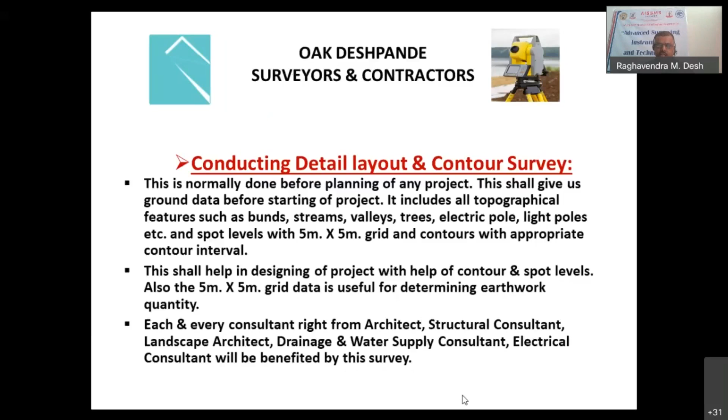Now, each and every consultant, right from the architect, structural consultant, landscape architect, services consultant, electrical consultant, will be benefited by this survey, and this data is very much useful for them for any kind of planning, estimation, and further execution as well. Now we'll move on to the other part.

Next part. Now, when this contour survey goes to the architect and the subsequent consultants, they prepare a plan based on this contour survey. Whenever this plan is prepared, we need to check whether it really fits on the ground. It is mostly for the convenience of the engineer on site. We can visually confirm that this is fitting well within the required setbacks and all, and the architects and the required consultants can come and check those things.

So we call it a block plan set out. After the planning is done based on the topographic survey, the layout is prepared and is ready for marking on ground. At this stage, we normally recommend to mark only the block plan on the ground, just to get confirmation about the layout fitting, and also to start infrastructure work, because on any site you want to start, you need to mobilize, build some roads, put up the labor camps and RMC plants and so on and so forth.

So for that, if the layout is marked, then you can visually see the areas which can be put to use right from the beginning, so that it doesn't disturb the entire layout. It should not so happen that when you are starting any work, you are putting some steel yard or the cement godown or the RMC plant, and suddenly you realize that the project has to start from the same site. So to avoid that, we need to mark all this layout on the ground.

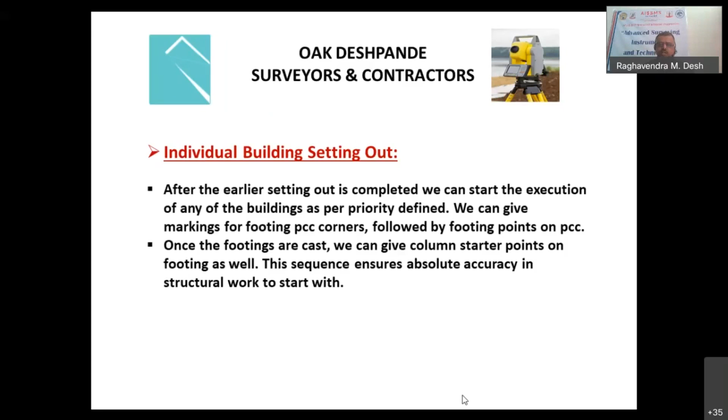So we can start with the excavation, go up to the required level, basement level, and then the individual building set out steps in. Now, after the earlier set out is complete, we can start the execution of any of the buildings as per the priority defined. PCC. Now in this process, normally, whenever we set out, we try to see that our visits to the sites are minimized so that we can optimize the work and give maximum output.

So it happens that once you go on the site, then the excavation is done. If it is an individual footing, we normally mark the PCC corners first inside the block plan set out. And once these things are marked, then the excavation goes on. Once the excavation is done, we don't need very much accuracy for the PCC. So the PCC has been laid there.

And once the PCC is done, now we have to start marking of footings or columns. Columns and footings go hand in hand. It's not that we mark footings separately and columns separately. The footing and column are marked based on the drawings available with us, the centerline plan and the block plan combined. When we mark these footings on the PCC, normally they are marked as a center line beyond the box of footing.

So the carpenter prepares a box of footing, the fitter prepares the base mesh and the column reinforcement. It is put on the site, and when we want to finalize the footing block, we normally mark the center line beyond the footing block, so that the footing box can be aligned with that center line, and so the column and footing are fixed.

Once you fix the footing block, we normally mark 5 points for this kind of setup. The 4 points are in a plus manner beyond the footing, and one is the column center. So they align all the footings and columns, and they fix the box there. Along with that, at times when there are individual footings, we even try to build pillars on the center line.

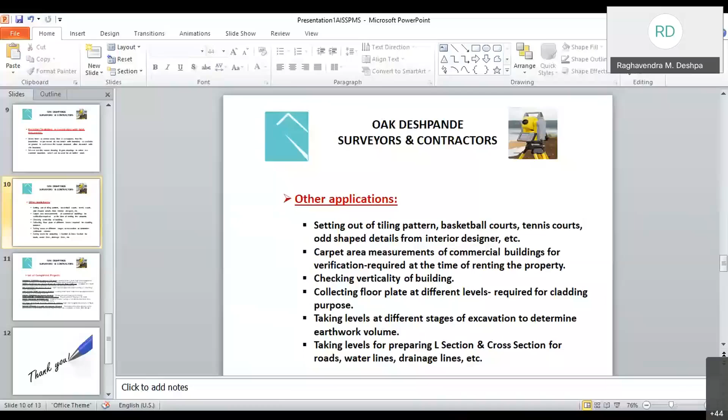Okay. So what we are discussing, the cladding. Yes, cladding. Then you have to take the profile of every level, and again the same thing. They are on the same basis, so you can take that profile in AutoCAD and see the difference between the top floor and bottom floor.

Now, why is this required? Whatever framework behind that cladding has been designed, at times you may have to put some plates in between to counter that difference. So there also you can use total station for cladding purposes. Now taking levels: as we're all aware, for excavation and earthwork you definitely need a total station, taking levels at different stages of excavation to determine the earthwork volume.

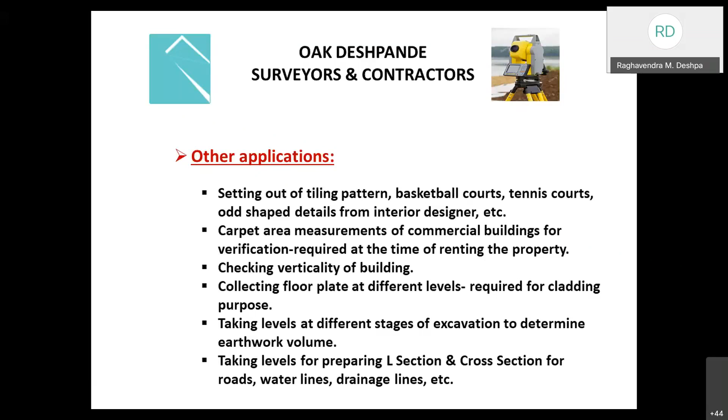This presentation is almost over, so I will share a few drawings with you now, which show these kinds of details which are taken as a part of the survey. I'll just switch over to these AutoCAD drawings.

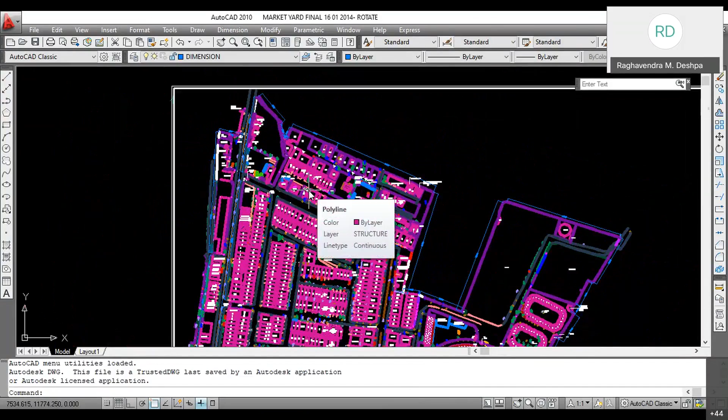Okay, now on your screen is the drawing of a market yard in Pune. This area is about 180 acres right in the heart of the city. This is the market yard for selling vegetables, flowers, and fruits. The purpose of this survey was to have a record drawing for the entire area, and also the area of each of the shops, because they want to fix the rent, know how many shops there are, whether they are in good shape or not, and likewise.

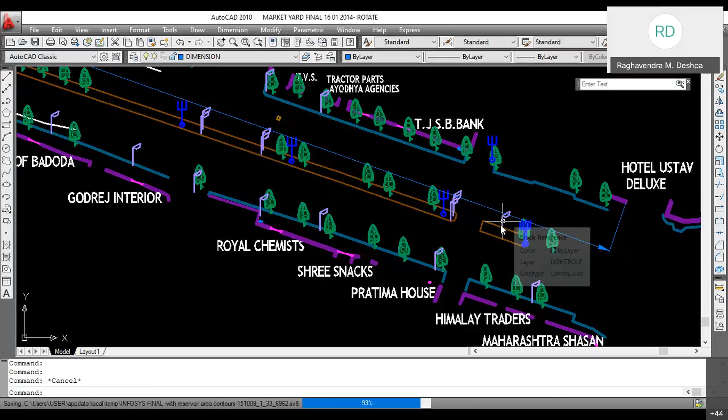So you can see that this survey includes the details. That's why I have shown you this drawing, the details of the data we collect on the drawing. You can see this is the footpath line, again the footpath line, so in between those two footpaths is the road. This is the divider. These are the light poles, the electric poles, the trees, and this road goes on, and they have the plot here. Their plot starts from here, and you can see everything is taken, named and numbered.

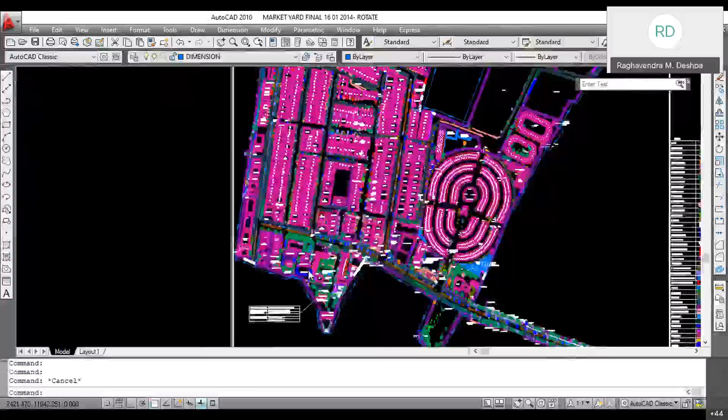So these kinds of surveys are essential when you want to have a record or an expansion. They can see that these are the vacant areas where they can go for expansion. Yes, they can definitely see that area, but they don't have the geometry of the plot. When you do the survey, you get the geometry of the plot, and then you can get those details and plan accordingly. So these kinds of surveys, what we call detailed layout, are conducted for any developed plot.

As you are aware, whenever you collect the data, okay. So whenever any kind of development is required or assessment of existing data is required, you need to have these kinds of drawings. Now, as you know, this drawing is not just a drawing; it's a technical document. So whenever we say we are referring to a drawing or civil drawing, it is always a technical document. So these kinds of documents we are preparing in the survey.

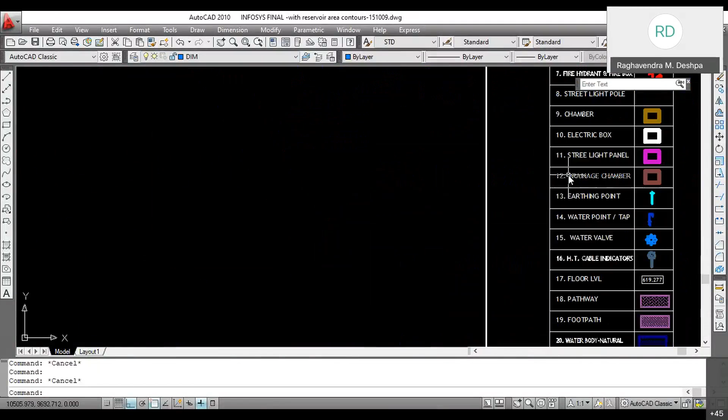Now the legend, we cannot show everything in the legend, but then we can definitely put these things on different layers. So these are all structures, then the landscapes, the lawns, the plantation, and likewise. So all these things we have mentioned, and this is the footprint of the structure. Now this footprint of the structure always comes with the floor level. Then these in between are the roads.

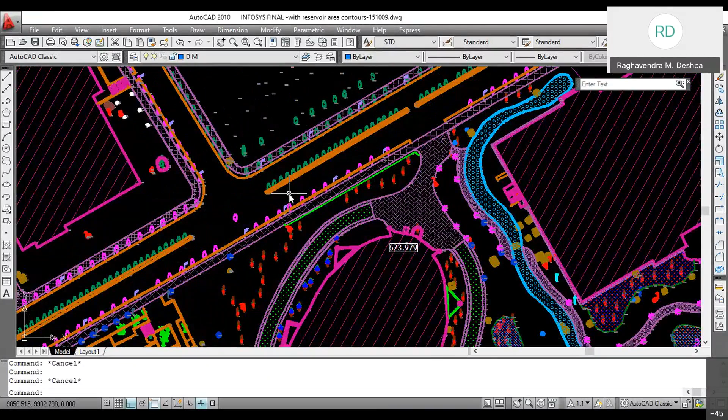As I told you earlier, now if they want to change the road or repair the road or any part of the road, they will always get the quantity from this AutoCAD drawing. They don't have to go there again and measure that. There is then no discrepancy later on between the contractor's bills and the BOQ you have prepared. It will absolutely match with each other, and then you can have the proper budget for these kinds of works.

Then this is a very basic initial stage drawing, a topographic survey drawing. I'm just showing you everything from the drawing that we are collecting here. You can see this is a 5 meter by 5 meter grid showing all the levels of every four corners of the grid, and then the contours. Now we normally switch off these layers. I'm just turning off these layers so that you understand exactly the nature of the ground.

Now you can see here a very defined line. This, as you can see, is the manhole which normally follows the course of the nala. You can see here this is the line which clearly represents the nala. Since it is natural and not very precise, it doesn't have specific dimensions. At places it just expands, and at places it is very narrow. These are the developed plots. Now this is a plot which MIDC has earlier developed.

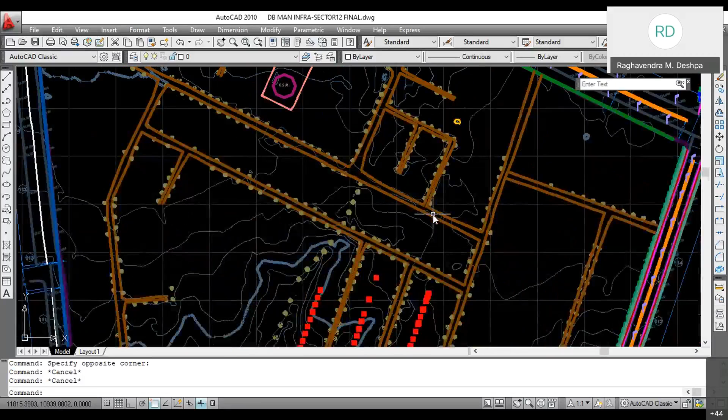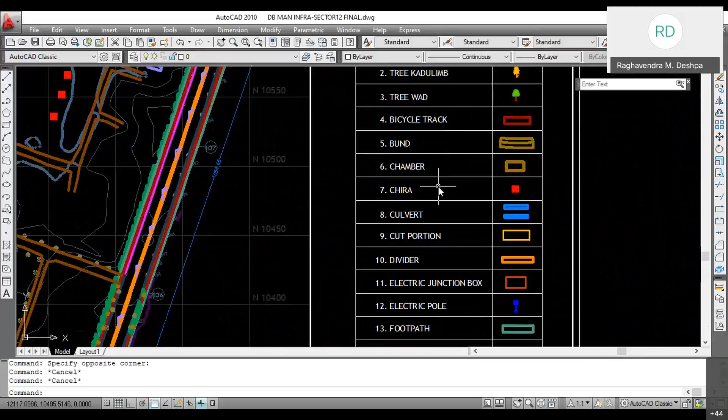So it shows the network of these roads and the areas in between, and it also shows the adjoining road, because whenever you want to enter into any plot, you also need to have the access level from where you want to enter. So likewise these details are there on the drawings. Then the legend, which gives you what things are represented by a symbol on the drawing. This is the very essential, very initial drawing on which the development will take place.

Now, when we give these kinds of drawings, they understand whether they want to keep the existing network or change the network and go for an entirely new layout. So this data helps them in determining these things as well. So decision making is also a part of a good survey drawing, which helps them in taking decisions on the existing.

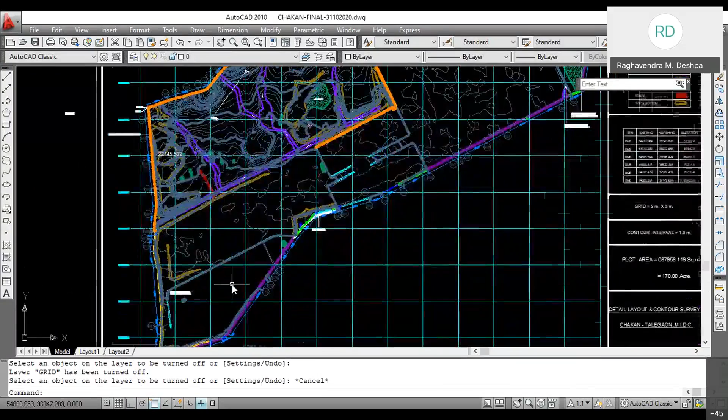Okay. Now you can see this is about 170 acres, and these lines are the nala on the ground, and they have already done some kind of gradation work here, and these are the retaining walls, which you can see in the cyan color. And as you can see from the contours as well, these are the undeveloped plots of land. So here again you can see these kinds of details which are required.

Then the benchmark is taken at a place on the retaining wall which will remain there for a longer time, even if they want to do any kind of development there. Again the legend is there, and this is how we prepare the survey drawings based on the data we are collecting and sending to the client.

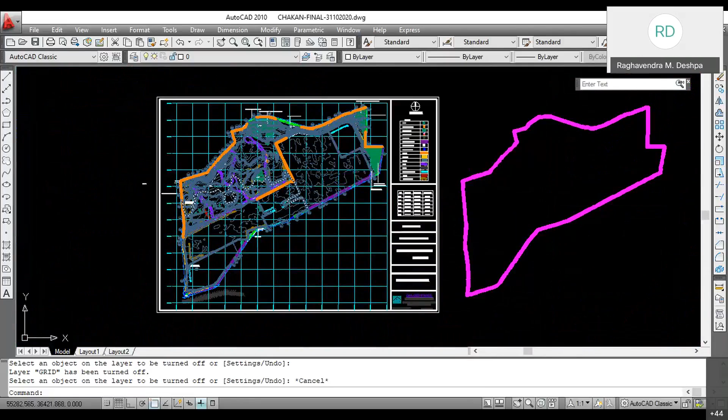Now, apart from these drawings, I'd also like to share a few drawings with you. As I told you earlier, nowadays surveys are done for different purposes. This is a survey for an IT park in the Hinjawadi area. We have done the survey for the trees which have been planted by them over a period of time, and you can see there are no boundaries here because we have not been asked to take the boundaries. We have taken the structures, which can then be superimposed on the entire layout.

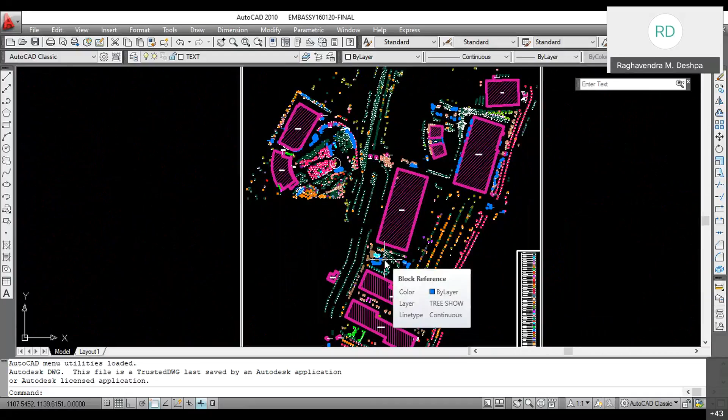As you can see, these structures will work as a base point for lapping on the layout. These are all trees which have been numbered. The numbers have been put on the trees as well. This is sort of an environmental audit. When this drawing is prepared, you need to submit it to the environmental department or the subsequent authorities. They want to check how many trees you have planted and how they have been there.

Unfortunately, I don't have the table at the moment, but all these things have been put into the table. That table shows the girth or perimeter of the tree bole or trunk, then the approximate height of the tree and the name of the tree. So this is again a tree census, but with the position of trees, how they are placed over the entire plot. This is a new type of requirement which has come up in recent times, and it is being done extensively by a number of agencies and companies.

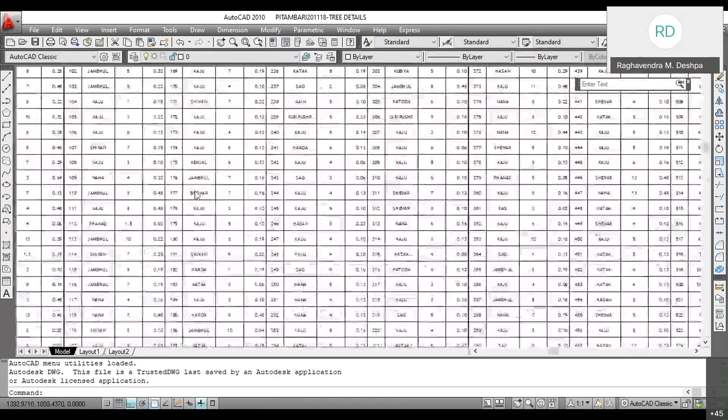Okay. Now I'll also share with you one more tree detail drawing. You can see this drawing is again numbered, and if you want to see, say, number 187, the details of number 187 are here. The approximate height of the tree is 6 meters, and the perimeter of the bole is 0.19 meters, that is about 20 centimeters.

Now, when you want to take a decision whether this tree can be cut or not, you have some norms to do that. When you do these kinds of surveys, it is very easy for you to understand which trees you can cut and which trees you cannot cut. So this is the purpose of the survey. Whenever you do any survey, you need to ask what is the purpose of the survey.

You can see the legend and how the trees have been named. You also need to know the name of the trees. At times they want the botanical name of the tree as well. All these things you can put in a table, and the table can be referred to for all further use. So this is one way of getting this data.

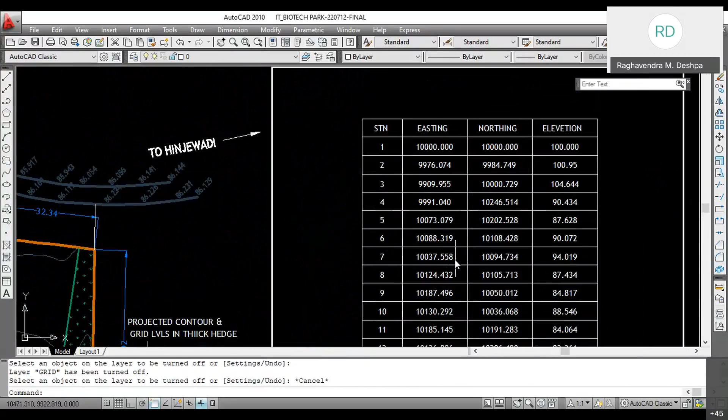Okay, so whenever a survey is conducted and the drawing is sent to the client, we normally give a table which gives the coordinates of easting, northing, and elevation. These are specifically the control points, or station points. Why are they required to be mentioned in the drawing or table? Suppose I have done a survey for a particular plot, and then the client decides to get the rest of the work done by some other agency. Then it should be easy for that agency to understand the control point locations and their coordinates. Only then can they do the next work.

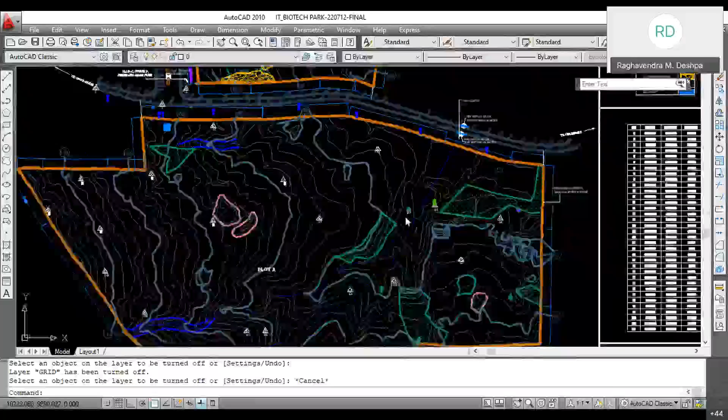So we normally put it on the drawing, or at least in the table, so that they can use these control points for all their further works. This is again one of the plots. You can see the features very well. You can see this nala following this line, going into some accumulation of water, and then going down to the culvert. This is the steep slope area. Again, this is an accumulation of water here, a small water-body-like feature.

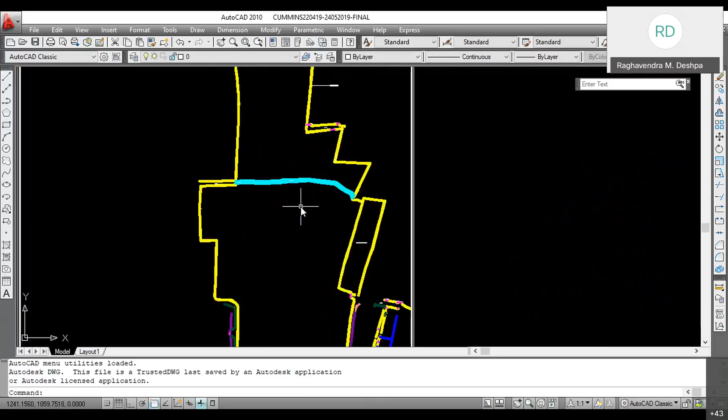from time to time. So likewise, we have done this survey for a company. Now, when we want to check whether these boundaries are correct or not, this is a village map. This is not exactly the way we should overlap, but this is again one of the documents which we normally overlap. You can see the yellow line is the line which is there on the ground, and the green one is the demarcation line.

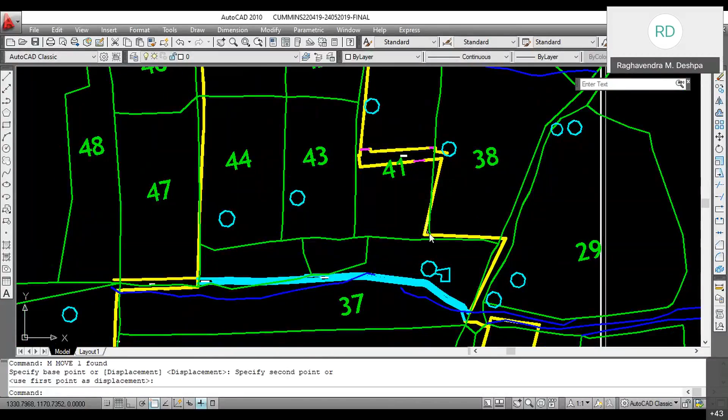Now you can see they are fairly matching. I would always say it is fairly matching because they cannot match 100%. So you can see here they are fairly matching. They are not going off the track. Here again, this is their plot boundary, and it is coming somewhere in here. Again, it is matching here, and this is a land they have purchased which is not there.

They have purchased part of this survey number 38. So there is no definite line here, but the survey number boundary is definite. So this is matching. Here also it is matching. This is essential to understand whether these people have not gone far off the mark whenever they have purchased a land or done any kind of development on that land later on without amalgamation of the entire property. So this is one of the uses of the survey and government demarcation.

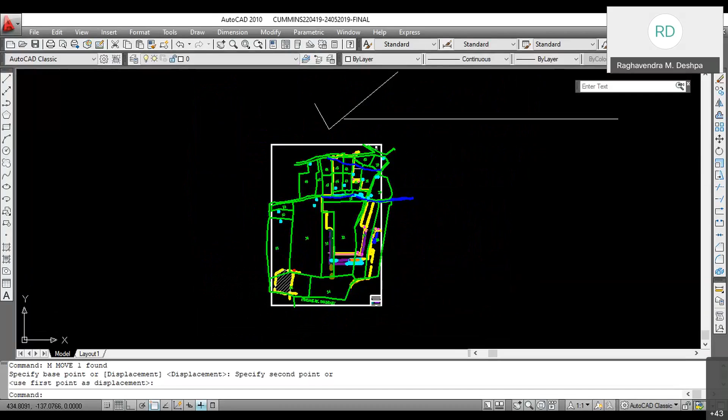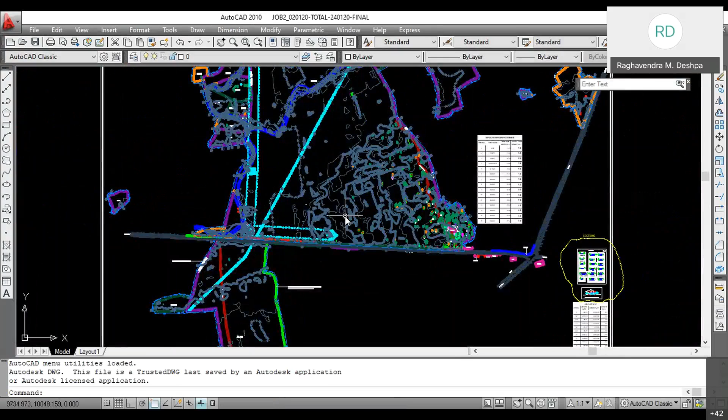Now this is again a plot somewhere near Bhiwandi area, about 115 acres and divided in two parts on either side of the road. This is the downstream part, and this is the upstream part. And there's a river down here. When we collected data for the river, the top edge line near the river edge is about 2 to 2.5 meters high above the existing water level.

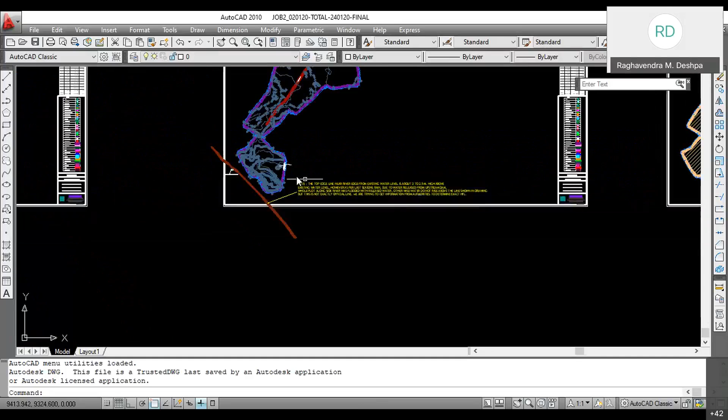However, as per last season's rain, due to water released from the upstream dam, the whole plot along the river side was flooded with the released water. Otherwise, water does not rise above this line shown in the drawing, but this is not exactly an official line. We are trying to get information from the authorities to determine the exact HFL. So whenever we collect any kind of data, even if that data is not final and exact, we still need to mention what that data represents.

Why I have written this note: I understand that this is not the exact HFL, but last year, as you know, the monsoon was very stretched. It went almost up to November and December. Very excessive monsoon happened, and flash floods were there at many places. This happened at this particular plot. So we have mentioned that due to the flash floods, the water released from the dam was more than usual. Normally, in other seasons, the water does not rise above the line shown here. So my plot is well above this level.

But the proposed development of this plot was warehouses. If you understand warehousing, there are huge structures. Still, those plinths need to be raised and filled up, and that cost is a huge cost. So we need to understand where exactly the HFL is, and how much area we can utilize even at the peak of the monsoon, as we call it in our area, the red line and blue line.

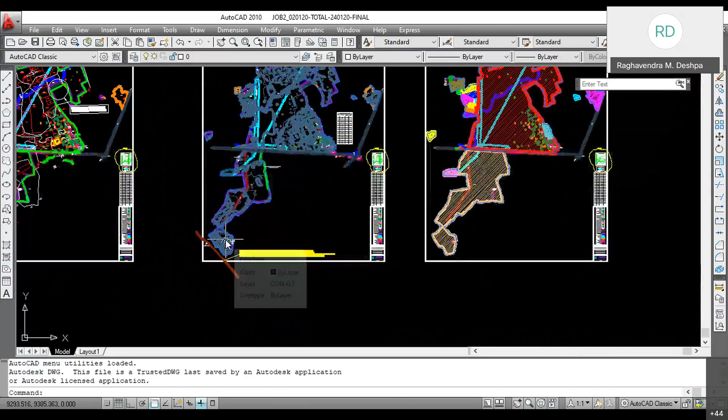Now we didn't get these HFL lines or red-blue lines last year because they were washed off by the floods. So now they're again setting up these lines based on last year's data. At the time of survey we didn't have that data, so we had to mention a note so that the client or the people designing are aware of it. Once they are aware, they can take things into consideration and put specific conditions or assumptions while making estimates or planning.

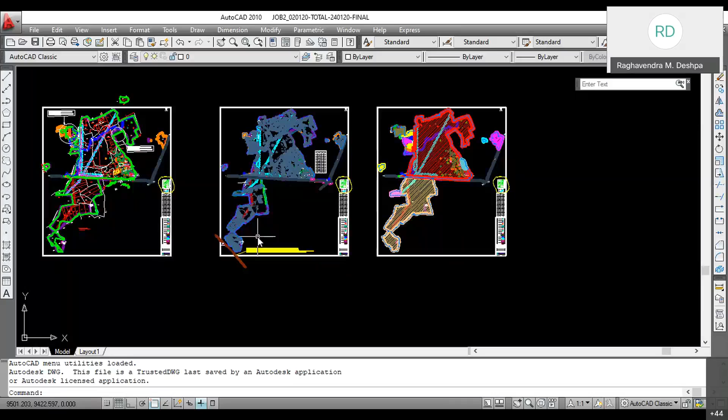So the purpose of the survey again defines it, and you have to mention and interpret as much data as can be helpful when you read the drawing. As you read any document, you also need to read the drawing, and at that time you should be aware of these assumptions or realities.

Now again, this is a drawing of a big society in the Pune area. This area is over 125 acres. It is a very prime location and a prime society, and all the plots are 10,000 square feet and above. Why was the survey done for this area, since it has been established for years? As development takes place, not only within your plot but surrounding it, some road widening takes place.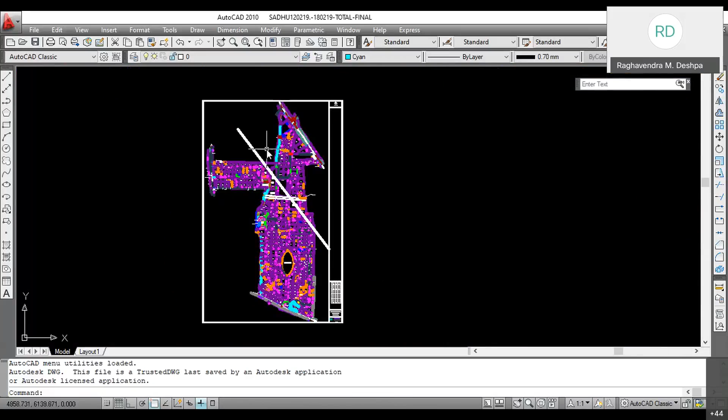As you can see here, this road has been widened and the footpath has gone inside. Again, here the road widening has happened. Now, the society had the record of each and every plot, but this layout was not sanctioned. Though the layout was there, it was not sanctioned, and the plots were allotted in some scheme. Refugees came and were set up in this society, they took the plots, and this society developed.

During the course of development, at times they have increased their plot in consent with the society, and that area increase or decrease has not been reflected in the society's record. They also have TDR and FSI issues: for whatever area they have surrendered to the road, to the corporation authorities, they want TDR. For these purposes you need to understand the exact area you are physically holding. So the survey shows how things are standing on the ground and whether they differ from your records.

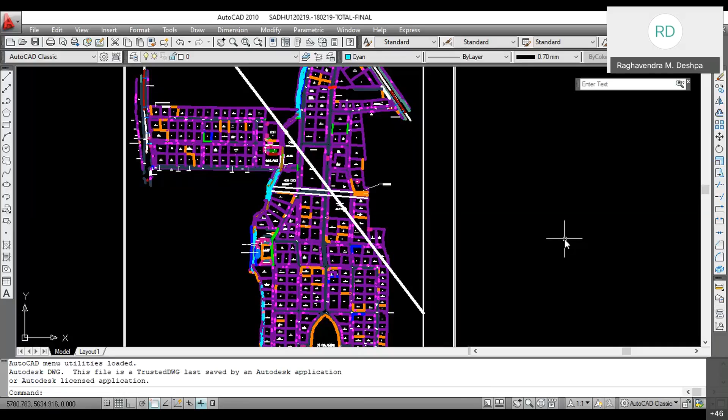But this transparency is there, and you cannot really hide things and say that we have just arrived at some conclusion without any backup. So these are very important backups, very authentic and authoritative backups, and they can solve many problems regarding the land parcels.

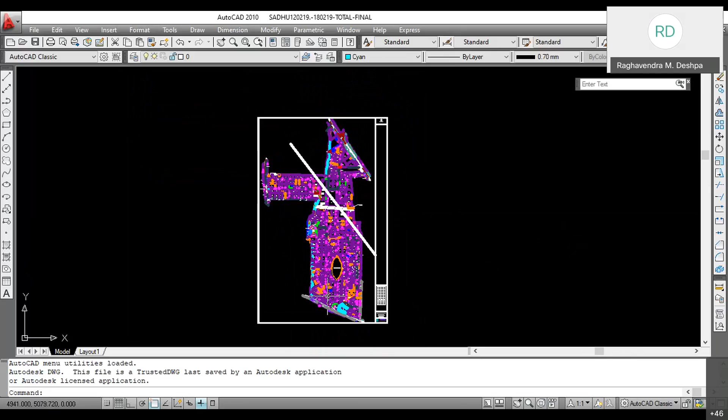I have shown you these drawings. Now, regarding the setting out of the drawing, which we have discussed earlier, I would like to show you how the setting out happens, how we work out the coordinates.

Now in this you can see this is the plot layout. This plot layout has been prepared based on the government demarcation, and this has been sanctioned by the respective authorities, and now we want to mark it on the ground. Now how to mark it on the ground? As I showed you earlier, this drawing has a number of control points which are shown on this drawing, as you have seen in the earlier drawing.

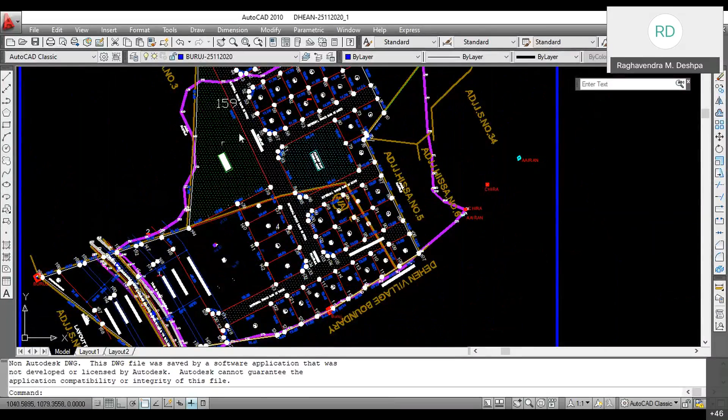So you have a network of control points, and this is how we can identify a plot corner point. Say this has been given a number, say 62. Now what is the coordinate of this point? We have a command in AutoCAD, ID, that is the identification of that point. When you say ID and click this point, you can see here it shows the coordinates of this point as

1082.2187, 1107.6636, and Z is 0 because this drawing has been converted into a 2D drawing. 2D means the Z axis has been put to 0, otherwise you will not get the exact horizontal distance, and AutoCAD commands like intersection, endpoint and so on also will not work. So we have made Z 0. So how can you do that?

All the data you collect from the total station is in 3D, with X, Y, and Z. When you download that data, it is in DXF format. What we normally do is save that drawing with save as, and put an extension like 3D, so that drawing is 3D.dwg. Once that 3D has been prepared, we again save as, and call it 2D. So the drawings are differentiated as a 3D drawing and a 2D drawing.

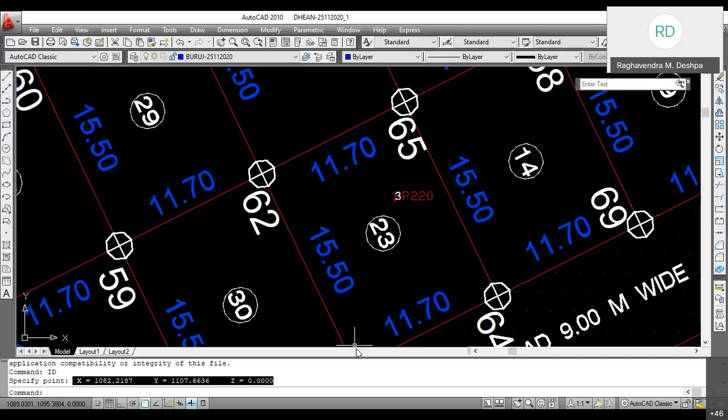In this 2D drawing, we change the property of all the points and make the elevation 0. Then the drawing becomes a 2D drawing. Then you can measure the distance between any 2 points, and it will give you exactly the horizontal distance. So you can see here the Z of this point is 0. Likewise, we take out the IDs of all the points, and now you have given the numbers.

Then we prepare a P line. As you can see, let me get this P line. This is the P line. We take the P line from point number 1, and we draft these lines joining the centers of these points. And likewise, you can see here all these P lines, the white line.

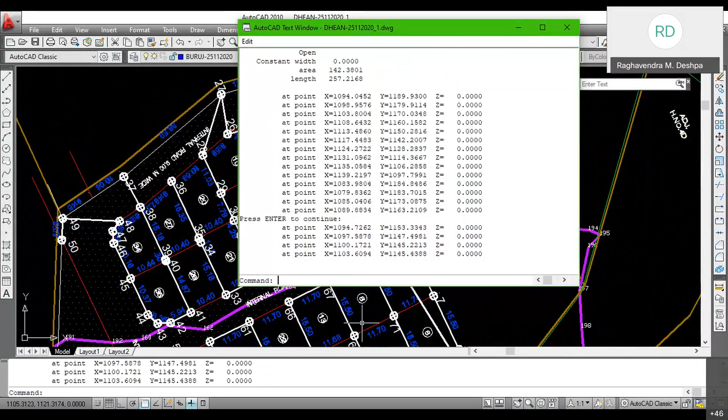And then when we say LI, that is, if you want to list this, you can see these are all the coordinates of the points. They are sequential: 1, 2, 3, 4, and so on. Then you can take these coordinates into AutoCAD, or even feed those coordinates into the total station. And at the time of setting out, you can mark each and every point.

And these points, when you mark these points, then a peg is put up at these points, and that can be replaced by a concrete pillar at a later stage. So once these plot points are marked, the roads get automatically demarcated in between. So you have roads and plots together. Now this is for a plot layout.

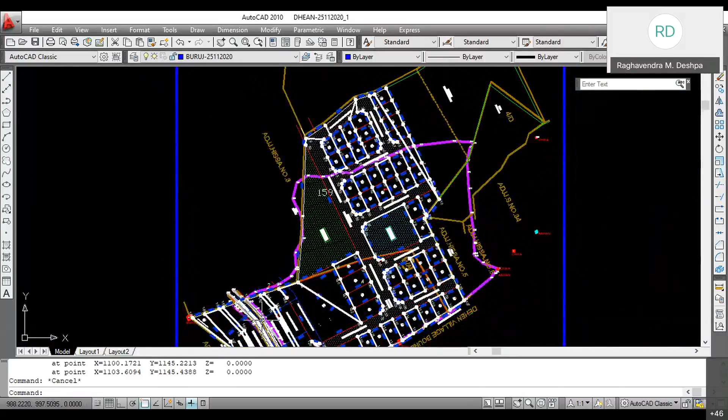As we have discussed earlier, we also have a building layout, when we mark these column centers, footings, and PCCs and everything. Now you can see here, this is a small bungalow. I've taken a small bungalow plot, and this has been superimposed on a survey drawing. This was the initial survey drawing with a block plan, and only the columns marked, superimposed on the drawing.

You can see these are the points P1, P2. These are the plot boundary points, as they were also to be marked on ground since the defined boundary was not there. So we have marked these points as P1, P2, P3, and the plot is defined. Then, as I told you earlier, if you have marked these blocks, you can see the B. The B points means the block.

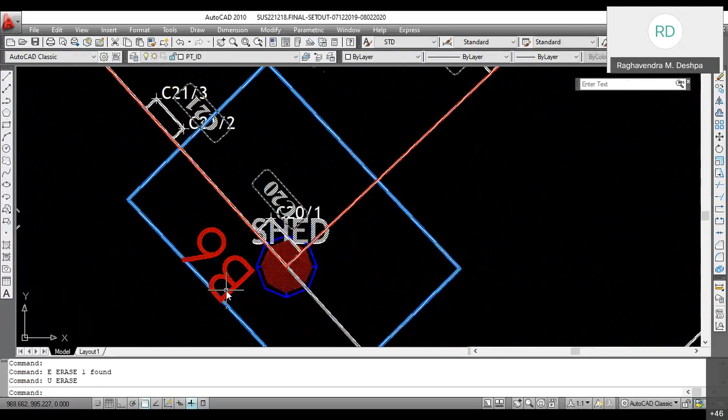This is a general interpretation. It does not necessarily have to be the same all the time. Whatever is convenient to you, you can just name it. So these are the plot block points. We have also marked this road widening line from the opposite side of compound wall, and this entire thing has been set out. Once set out, it has been checked by the architect and the site engineer to get these marginal distances, side margins, front margins, rear margins, and likewise.

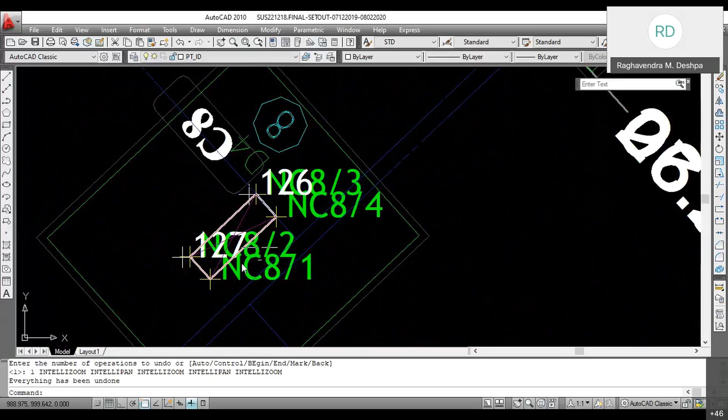And then the rest of this marking starts. Now, as you can see here, people sometimes ask us to give a corner point of the columns rather than the center point of the column. So we have given them these 4 corner points, and likewise all the column points are marked. For the PCC, we have marked these corner points. I'll just draw a line to explain my point. These are the points we have marked at the time of PCC.

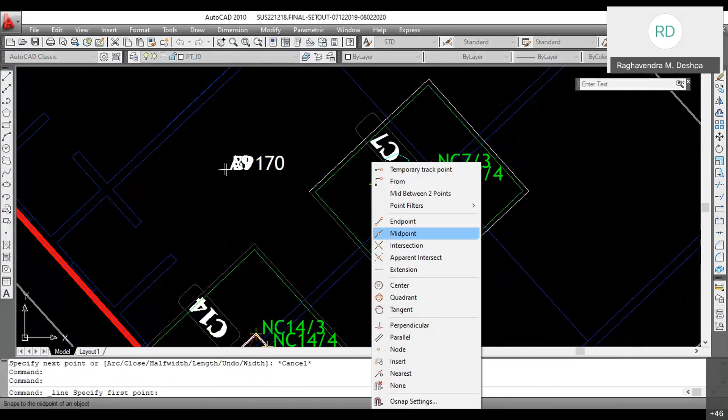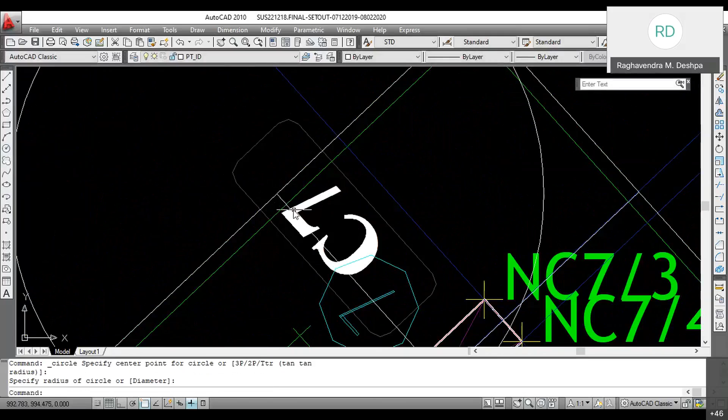Now, when the PCC has been marked, as I told you earlier, the footing points are to be marked. So how do we mark the footing points? I'll just draw this plus line going to the center of the footing. Now you can see the column center and the footing center are the same. Now we take a point on the edge of the PCC here. So this is the point we will mark. We will mark this point at the edge of the PCC, and we will mark this point here.

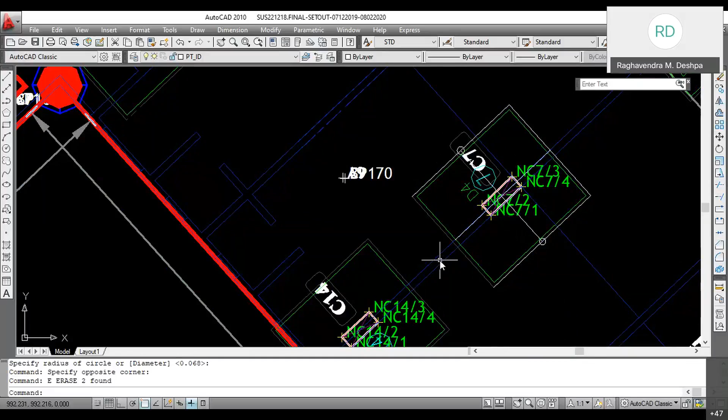Now, when these 4 points are marked, you will put a nail or some oil paint marking on these points, and then the carpenter can fix his footing box. He has already put nails at the center of the box on four sides, so he can just align with a line dori, and he can align the footing with these 2 points as well as these 2 points. Once the footing is aligned, you can also align the column center, and then it is fixed. And then the footing is cast. So this is how we work out setting out on any plot.

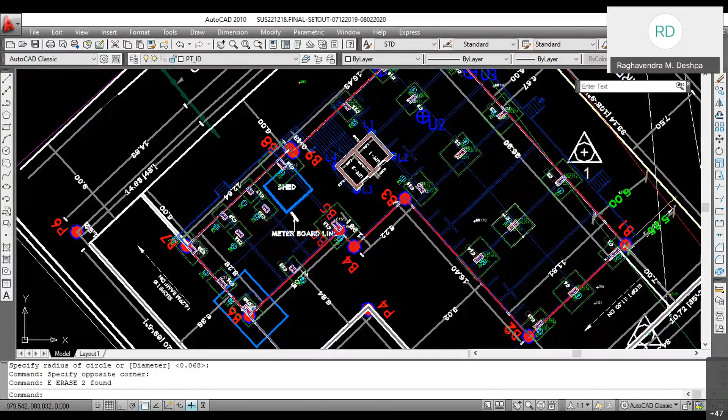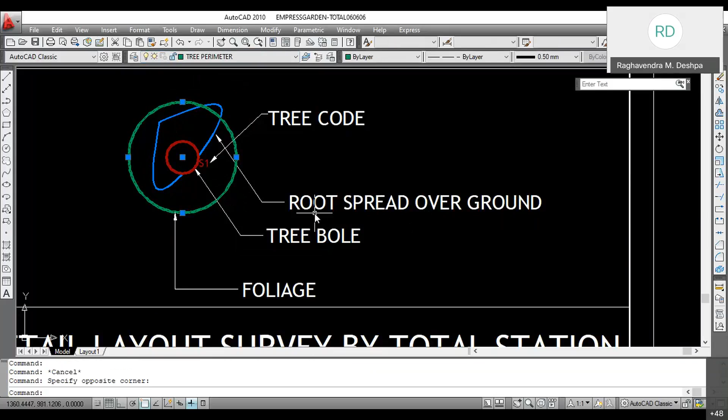That is the foliage on the ground. Okay, this is the foliage. So accordingly, all these details have been collected. You can see, where we have not shown any foliage, these trees are very small. If you can see, you can just check the properties. The circumference, that is the perimeter, is about 1 feet, and the radius is about 2 inches.

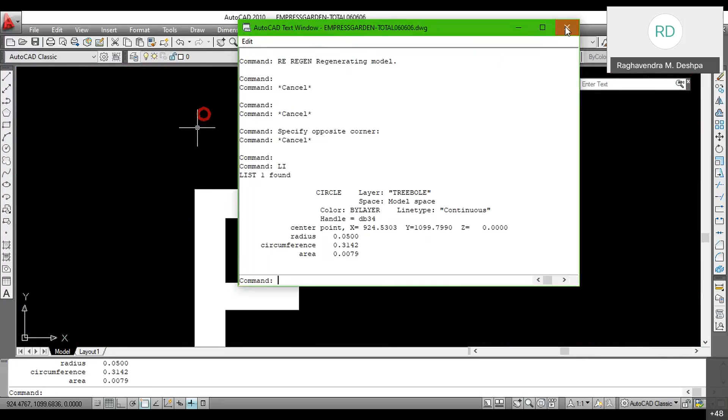So this is how you can distinguish between the trees, say about 4 inch, 2 inch, or say 100 mm or 150 mm, and likewise. So this is how the trees are. We have shown the trees, and you can see the amount of details we have collected here.

So one more inference we can derive from this drawing is that the area in between these two. Now, if you see this area, the area between these two is an area open to the sky. This is one of the things which we have derived from the drawing. So again, interpretation when we read the drawing.

So if you want to make any kind of small structure or any kind of development or a pathway or something like that, you have this much area available which you can very well utilize without disturbing any of the surrounding trees. So this is how you can plan accordingly.

So at places where you can see here, it is very difficult to have any kind of development as the area is thickly vegetated. I mean, the foliage has been covering the entire area. So you may have some ground clearance, but not necessarily that any development will happen there. Sorry. So this is one of the purposes of this drawing.

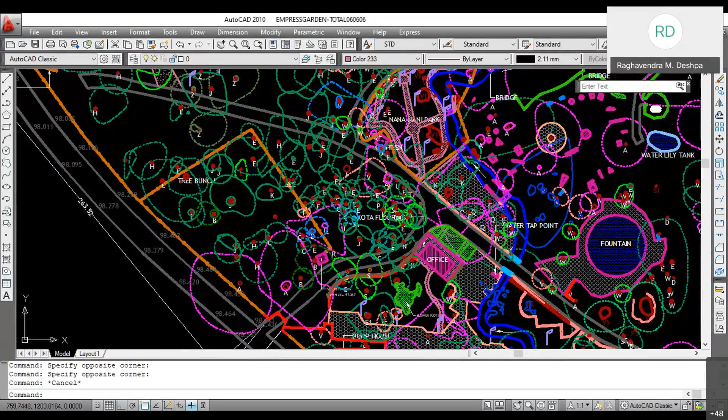I will show you one more thing. This I would be elaborating a little bit on the last day when we want to take a case study or sort of a thing. Sorry, not this drawing. Sorry. One more utilization of the drawing. But I will tell you. Okay.

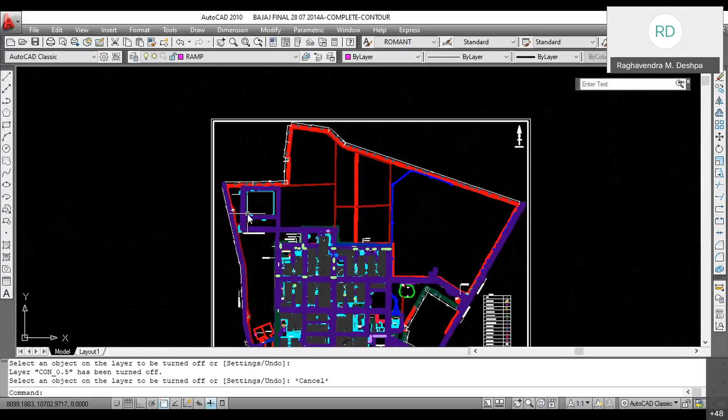This is a drawing of a company in Aurangabad area, Waluj. This is about 900 acres, the total area. Now, this has been there since the 1960s and 70s. So again, they have accumulated the area over a period of time. They go on purchasing the area and develop whatever they require. Now they want to create a new structure in this corner as a vendor park.

Now, when they put up the plans, the authorities told them to give the up-to-date drawing of their entire premises. So the survey happened. Along with the survey, they also have a requirement to draw their, as you can see here, domestic line, firefighting line, industrial effluent line, and stormwater line. So they want us to show all these lines on the same drawing.

So we have done it on the same drawing actually, but when we want to give it as an output, we have to have a different drawing. This particular drawing gives you the area of the road. Now you can see this is the road edge. This is again the road edge. This is also the road edge. So all the area in between.

Now these roads are not concrete roads. These are asphalt roads. So if they want to develop the roads, they need to understand what is the area of the road today. So this will give the area of the roads. So we call this drawing the road drawing. Then we go in for the domestic line. So when we see this drawing, it will only show a domestic line. It won't show any other thing.

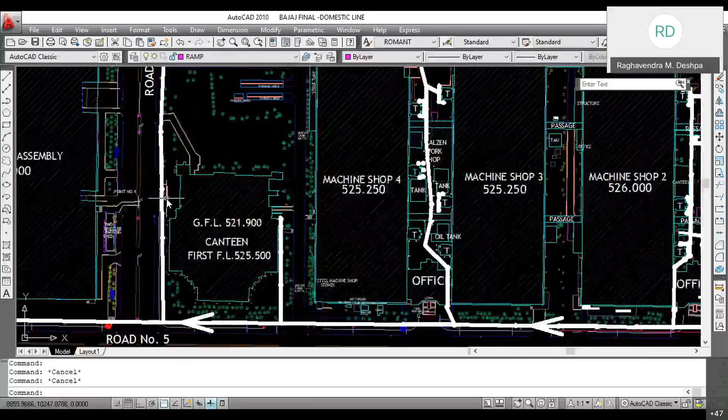As you can see, this is the domestic line everywhere, and these are the chambers on the drawing. So this is how the lines have started and ended, and the main lines, and the direction of the flow has also been mentioned in this drawing. So these are all the data you can see here. This is how the lines have gone inside the toilets. These are the toilets. So this is how the survey can be utilized for different purposes.

Now you can see again, if you see the stormwater line, now here you can see this is again the stormwater line network. Again, you can see that for the stormwater line, this is the rainwater line which is inside the floor shop, and from there they have taken it out.

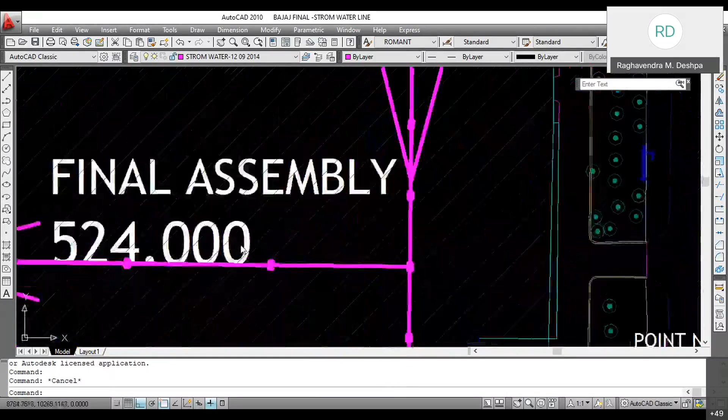So when these chambers are there, the number of chambers we have shown, the position is correct, but the size and these things are indicative. We could not measure the dimension of the pipe actually, so it is just the pipeline that we have mentioned here.

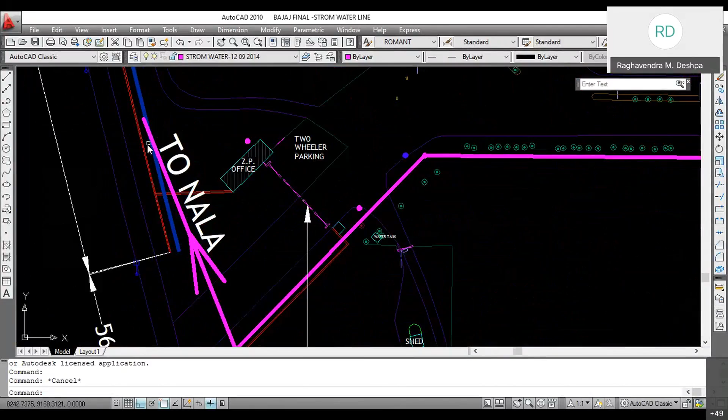You can see how they are collecting the stormwater and going out, and then from there it is going out in here. Now again, they also need to show where it goes out. So this goes into the nala. So this part goes into the nala.

Here it goes from here in the open trench. Actually, you can see this goes here into the open trench, and then again from this trench into the nala. So this nala takes it further on the other side of the road. So this is how the data is there in these drawings. One more drawing. This is

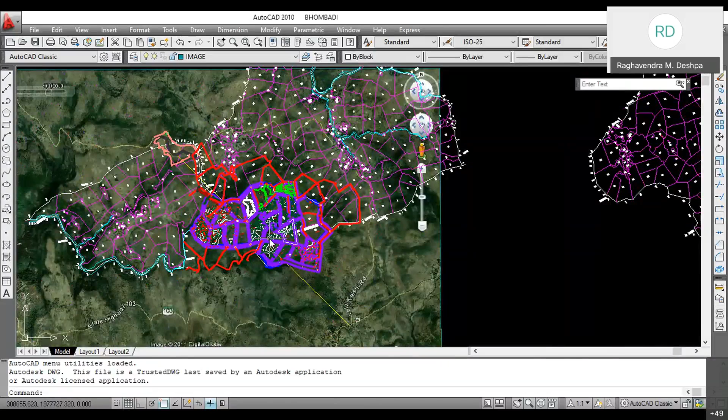Okay. Now, what is the difference you are seeing from the other drawings? That when we are working, the big land, chunk of land comes, ensure that whatever land has been shown to you, the size of that survey number on the government demarcation of the village map.

So normally this is how we put the village map on a... This is the Google image now. This is available in the open source. We have not purchased it or we are not doing anything here. So what we do, we normally do the overlapping of the village map onto the Google image.

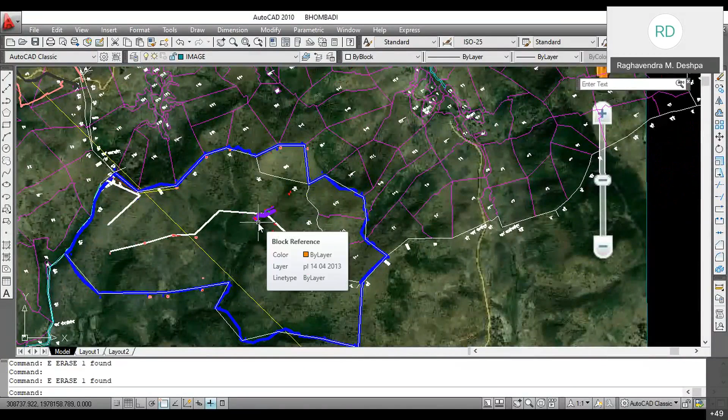Then we understand the configuration of the survey numbers, what we have been talking about, or what land we have considered. We are considering to purchase or considering to develop. So we have the tentative outline of this land, or you have a list of the survey numbers you're going to purchase. So from these survey numbers, when we superimpose...

Now, to superimpose any village map on a Google image, it is some sort of a skill which is required, because then you should be able to find out the similarities between the shapes and sizes on the village map and on the Google image, which normally happens as the cultivated fields, or what we call वावर, शेतीची जागा. So with those cultivated fields, those shapes are defined for years together.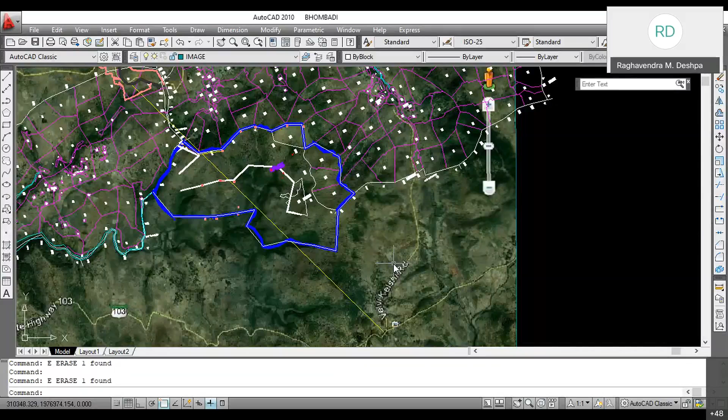It may vary slightly because they have been plowing, maybe increasing the plot a little bit every year. But otherwise, you can see those features. Then the village boundary, which normally we call shiv, normally happens either at the end of the river, the river is our village boundary, or at the ridge on the top of the hill.

So these two lines are normally undisturbed, and based on these two lines and these two profiles, we can fix the village map on the Google image. And once the village map is fixed on the Google image, then you understand the configuration of the entire property and how they are placed.

Then when you go to site, you collect some data, even with a handy GPS. You come back, then you are told that this is the corner point of, say, survey number X, this is the corner point of survey number Y, survey number P, Q, and so on. So you collect that data, you put it on Google, you identify it with the survey number point, and then you see whether those points are really falling in the same position or not.

Because nowadays you can be very easily taken for granted for not knowing these kinds of things, and some false land is being sold to you. You take that land, but when you go to take possession of that land, somebody comes up and says this is my land. So this has happened over a period of time. This will happen in the future also.

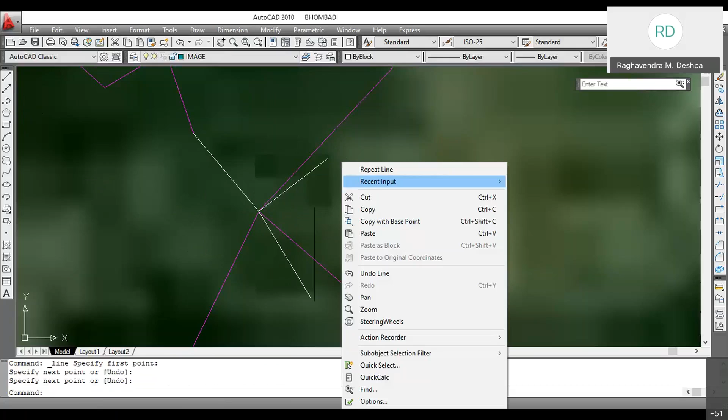What this information gives us is how many survey numbers have started from this point. Now you can see here, I'm not able to click on the line, so I'm clicking a little bit outside the line. So you can say from here, four survey numbers start. So you are very likely to find a ledge from somewhere here to here, about 3 to 4 meters. Here again the same thing, and the same thing.

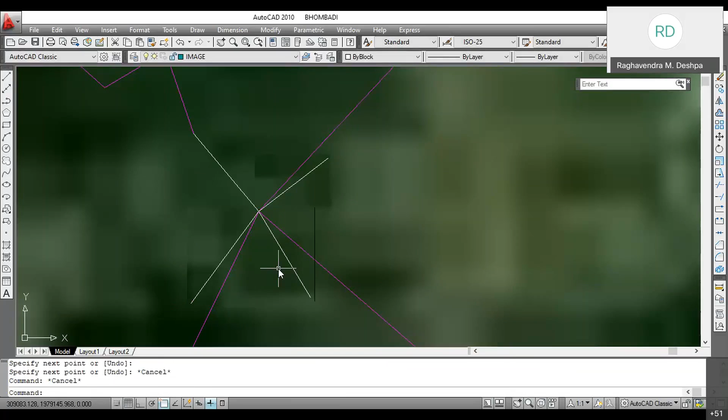And in between you will find a gurus or a center point, which is again a pile of stones arranged in a circular manner. So that means you have found a corner of a junction of 3 or 4 survey numbers. And likewise, when you superimpose these points on the Google image, the Google image already has the global coordinates, lat long, and your points, when you take them with a handy GPS or DGPS, are again lat long, maybe degrees minutes seconds or decimal degrees. And when you put them on this drawing, you come to know what these points are.

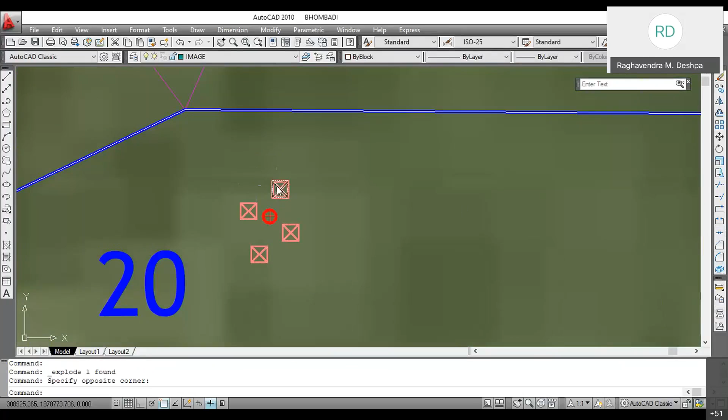So suppose I get a point here exactly, I can very well say that whatever has been shown to me is correct. Now you can see here, these are the pillars. This is not exactly the iron. Let's check with that. Now this is iron. You can see this iron is close to this point, so there is a possibility that there was definitely an iron here. Again, this iron is showing three lines. So it is like this, one line, and it will follow.

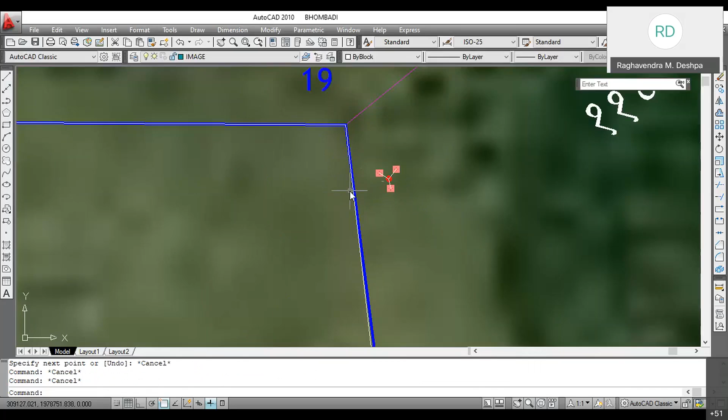It gives you an indication of the direction of where the survey number is actually starting. So you can see here, this is how the iron will be on the ground. Again, you can see the similarities between this shape and these points. So it has this particular iron at this particular location. Now over that period of time, and given the accuracy of the survey maps, this may not match with this.

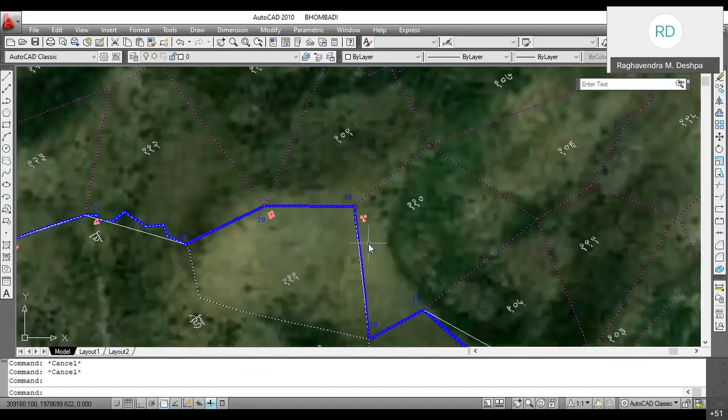Now because this map lapping has been done from whole to part, we have not just taken care of these two irons. We have taken care of how the survey has been superimposed. So if this is coming close to the corner points, the survey is on the right track. So you are not being dumped with some land and you are not being given false land. I will elaborate on this on the last day when we take a case study. I will try to bring in more drawings which will explain how the lapping has been done and how we arrived at the corner points of any particular plot.

So nowadays we also say that we can find your land. You just give a 7/12 extract of your land, and then we can show you the physical position of that particular piece of land. Now, whether that is encroached or not is a different story altogether. But I can show you. I'm saying this very confidently because of the interaction between Google, the village map and the government record. With this interaction, you can say, okay, this is the boundary of my plot.

You can talk to the people if your plot has been encroached, or you can secure your plot. And even if the government surveyor comes, you can show him the data, and he will be satisfied and can make it official, of course after checking his record. So this is how all these drawings and the surveys we have been conducting work. This is not really a lecture, because I wanted to share the drawings and the data, how it is collected and how it is represented on the drawing. Now here also, as I can show you, this is the survey of the plot that we have done.

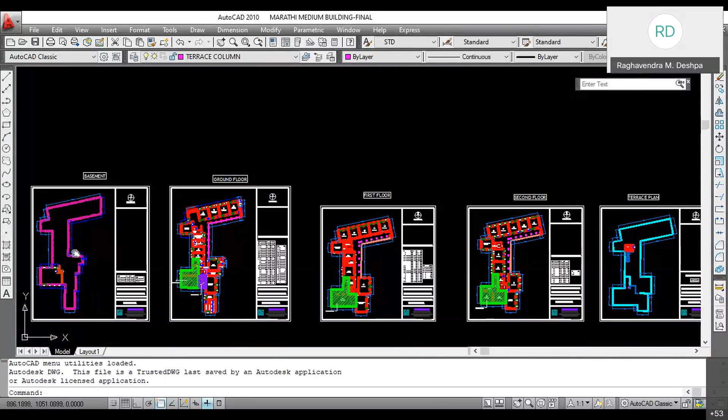And inside that survey, this is a school building. Now they wanted to again modify the school building, wanted to increase the size of the classrooms, wanted to rearrange the offices and all those things. So this is an almost 100-year-old school, so they don't have record drawings with them. So again we step in and we have prepared these measured drawings.

Now this is a drawing measured either with total station or with tape or a combination of both. And then we have prepared all the floor plans. Now you can take these floor plans and the areas, and then you can work out very easily based on these drawings, even the dimensions, the doors, windows. Now, as you can see, this is not an architectural drawing, so you won't see it aesthetically very pleasing, but it is giving you very correct data. That's for sure. Again, we have mentioned here the window or door opening schedule.

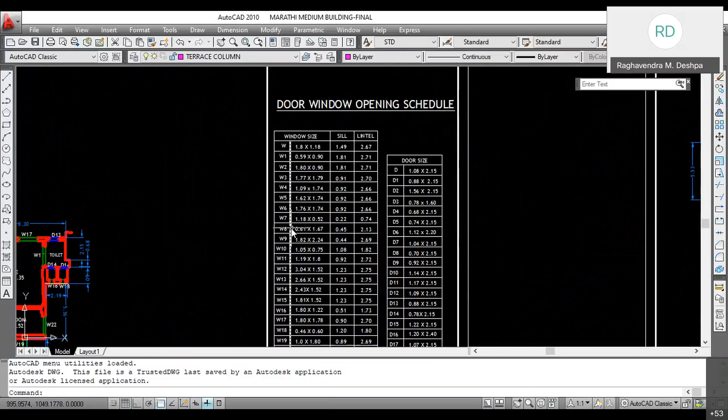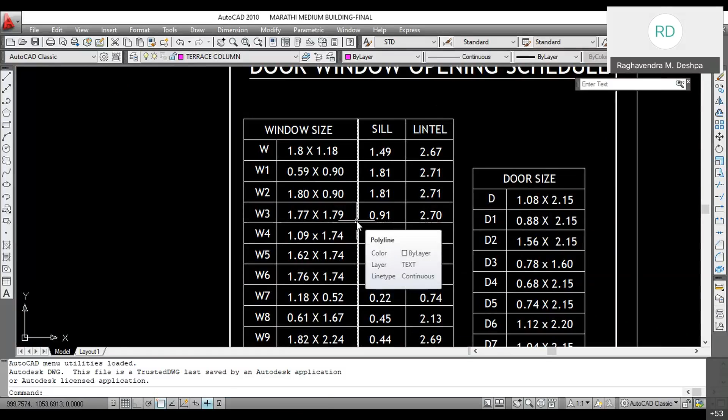Now, normally, whenever we are constructing a new structure, we say that the sill level is at 0.9 meter or 1 meter, and the lintel at say 2.1 meter or so on. So here also we measure each and every window's sill level as well as the lintel level. The doors are all at the same height, but the windows may not be the same, especially after the construction has been done and they have done some modification to the earlier drawings. So this is how the door window schedule is given.

So these are the few things which we have been working on over the years, and the purpose of sharing these drawings was to show you how different drawings have different variety, how drawings have different requirements, and how they are represented on the screen. So this is up till now. My presentation and my drawing sharing is over. If you have any questions, then we can start the interaction for this section.